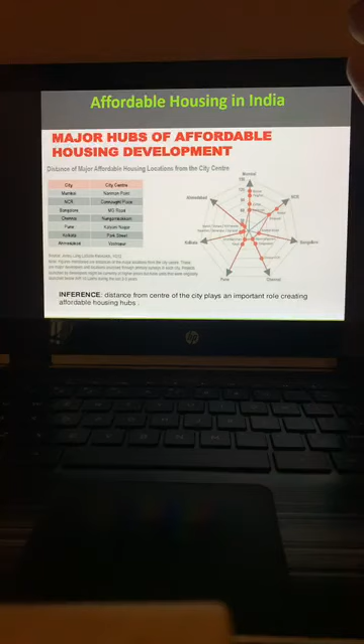Regarding income levels and housing, this is an old report, so it's not very clear, but I'll try to explain the points. Here are the major hubs of affordable housing and the distances - this chart is given, I've shared this PDF, you can see it there. This shows the distance in each city from the main center - in Bombay, it goes as far as 150 kilometers, and in Hyderabad, it is 30 to 40 kilometers.

We have seen the boost for affordable housing as landowners and MHADA join hands. One working model is making landowners partners in the development. Another model is NGOs coming forward to make land available for affordable housing.

Ministry of Housing and Urban Poverty Alleviation is the ministry in central government. They have come up with a mission to expand institutional credit flow to the housing needs of the urban poor, and they will implement the credit-linked subsidy scheme, CLSS. The government is willing to give subsidy to poor people who have income levels less than 6 lakhs per annum.

So that's the different policies. Why should we know about it? It's important for us, the designers, to know this information because we know which product to design for our clients. By eligibility, whenever we design a product, it's not that we just design 1000 square feet or 1200 square feet, because ultimately we have to keep in mind the cost of construction, the cost of land, and the size of the product, so that we can reach out to the target segment in that area, in that location.

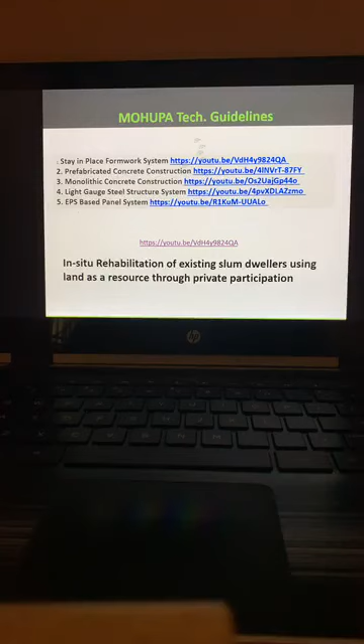So these are all the 5 technologies approved by the Government of India that can be adopted in affordable housing. We have a study report from Andhra Pradesh where they constructed sample houses using 21 different technologies, showing models both before and after completion. They surveyed people's feedback, and the best feedback was for technologies 2 and 3, that is prefabricated concrete construction, precast, and monolithic concrete.

Apart from conventional construction, it is always a challenge to deliver housing within the given time and cost constraints. So it is a challenge for the government, and the government also encourages slum rehabilitation.

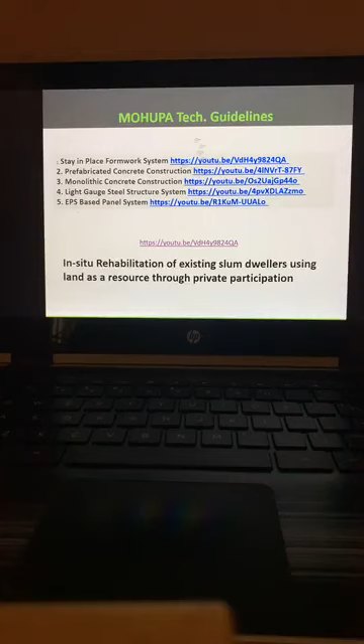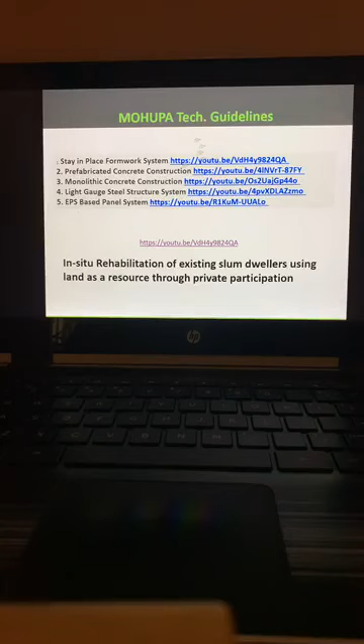In situ rehabilitation means you convince the slum dwellers to participate in the reconstruction of these slums and rehabilitate them in the same area, because the land cost is high, and because of the slum the land value also goes down. So we do the survey, convince the slum dwellers, take up that land, make them partners in that redevelopment, and give them better housing with better amenities.

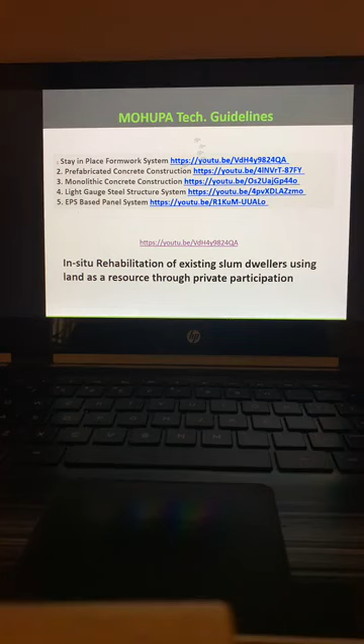This is also allowed by the Government of India - identification of the slums, bastis, and government housing areas.

We also have this GHMC report, where there are 1,476 slums in Hyderabad, out of which 1,179 are notified. The total slum area is 80.45 square kilometers - like a big city, though dispersed. This is 12% of the total GHMC area, which is about 600 square kilometers.

The total slum population is 19,51,000, which is almost 28.65% of the population, and the total number of households in the slums is 4.6 lakhs.

We have also studied road condition and power supply. For roads, 54% are not satisfied at all, 23% average, and 23% okay or good. For power supply, 34% is okay, 33% average, and the rest not satisfying - but since people can't live without power, they somehow manage to make it available.

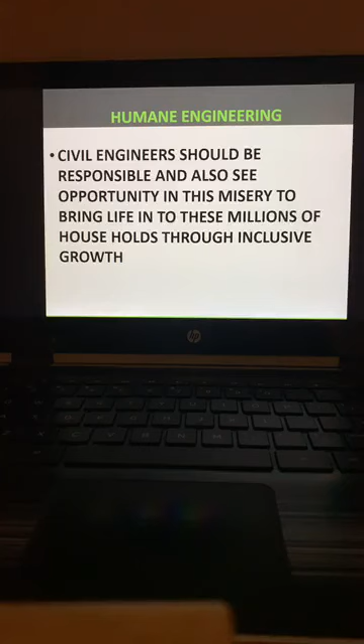So today's topic is this. I am going to explain the details.

There is a government policy which encourages private-public partnerships - we can tie up with corporates, take the lead to bring them in, convince them and convince the people. Don't depend on the government itself. We can work to convince slum dwellers and basti people to convert into slum rehabilitation, and bring in corporates who can invest, while we do the planning and design.

There are many schemes for affordable housing projects with public-private partnerships. This is Model B, and Model A is a private-public partnership with private land-based subsidized housing, the CLSS scheme for EWS, LIG and MIG. So private land can also be converted - whoever has land who wants to convert, we can make a proposal under AHP, go to the government, and convert it into affordable housing. This is also private land-based subsidized housing for EWS, Model B, where the government becomes the main implementing agency.

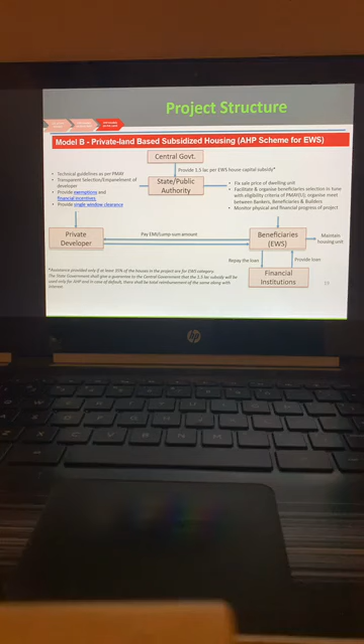So this is the project structure. We can get involved - in fact, I am working on this. That's my experience - we can achieve this if all engineers work for it and plan for it.

In mass housing, we have done Janapriya, Saket, Manjira, Sanjana, Modi clients. We have an experience of 20-30 million square feet of affordable housing, and in Cyber City also we have advised, and on government projects. We have worked on the married accommodation project, which is about 1,000 crores plus in value.

In Telangana housing, we worked on policy for 1 lakh houses to bring in technology-neutral approaches, and implemented about 4,000 houses. In AP, we advised for 60,000 houses procurement, housing at a saved cost. In Maharashtra, we did advisory work in Nagpur for 50,000 houses. In Tamil Nadu we have done work too, and we guided BTech projects and summer internships on slum rehabilitation, on how it can be made viable. We have also worked on private-public partnership projects, preparing DPRs in Andhra Pradesh.

This is the affordable housing implementation presentation we made to the government. These are the options: Option 1 - each site, one package, making it 250 packages. Option 2 - 4 or 5 sites into one package, making it 1,500 units as one package. Option 3 - average 4,000 houses into one package, making it 25 packages.

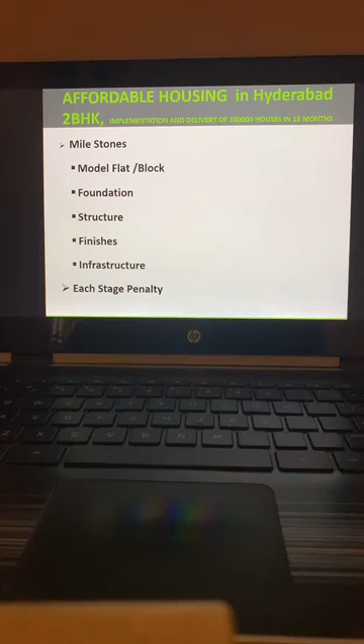Milestones will be model flat, foundation, structure, finishes and infrastructure. At each stage there should be a penalty if the contractor doesn't complete. So we have promised we'll bring in a workable contract model with contractor pre-qualification, and joint ventures will be allowed for technology providers. This has been implemented.

Design considerations for affordable housing projects: we have seen in the past that failures happen because there is no study of the requirements of the people and their expectations and aspirations. So family interaction, group interaction, neighborhood, water, waste management, energy management, microclimate management and finance management are all things we must study when planning affordable housing.

For family interaction, we should provide space for living areas, corridors and community interaction like a community center and restaurants. For group interaction, we need open spaces where groups can meet, particularly in India play areas like cricket, that we should create.

The relationship between neighboring houses, with access chosen for good reason so people can meet each other, and provision of a nursery school, primary health center and other minimum requirements.

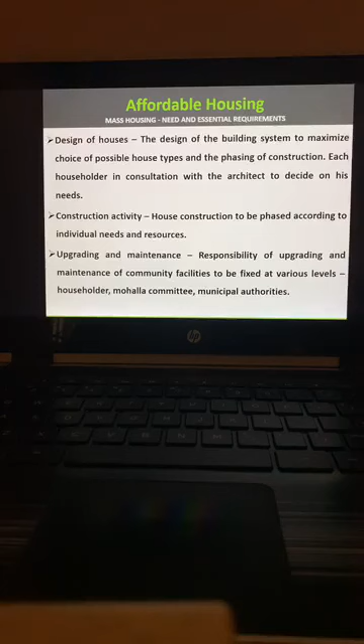For water, waste, energy and environment criteria, we definitely need sewage treatment and recycling because the cost of water is high, along with proper disposal of solid waste and sewage, and recycling of storm water. These are all important criteria to keep in mind while planning, meaning the construction budget should account for all these needs.

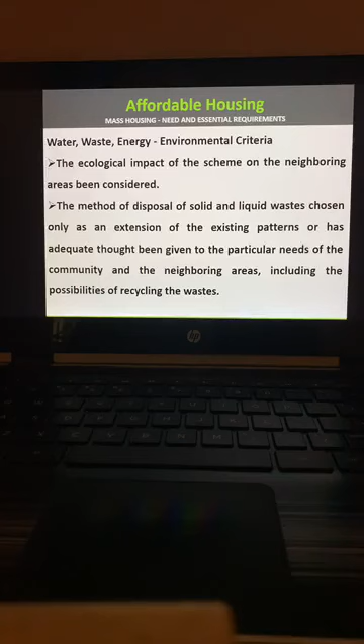Garbage management and long-term quality and quantity of water supply are important. By recycling water for flushing and gardening, you can reduce water demand and ensure quality water supply.

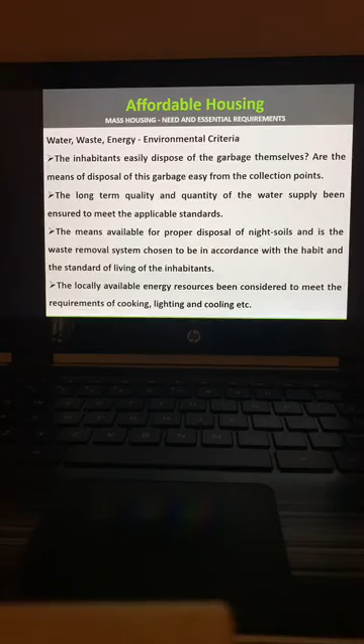For the physical component, we should create a cohesive group of 400 to 500 families per group, with housing density of 85 to 100 families per hectare. Land requirement will be about 5 to 6 hectares within the city, that is about 12.5 to 15 acres. Average plot size should be 40 square meters, and house area up to 30 square meters.

Land is allotted to community facilities like kindergarten, primary school, community center, temple, mosque, and other prayer halls, health and family planning clinics, roads, footpaths, parks, open spaces, and plots. So cost of the land, subsidy for the land, and all that.

This we have done the working. Now to deliver these projects, we have done the study. We have taken a report where, because investments are there for affordable housing by the government and by HUDCO, they are investing and lending money for affordable housing. So there are many foreign construction companies coming up with cutting edge technologies, and there is a demand supply gap which we have seen.

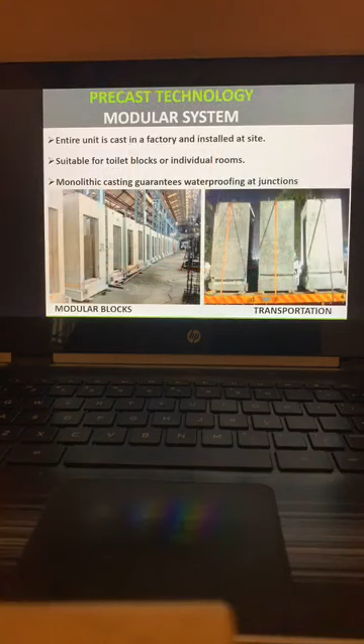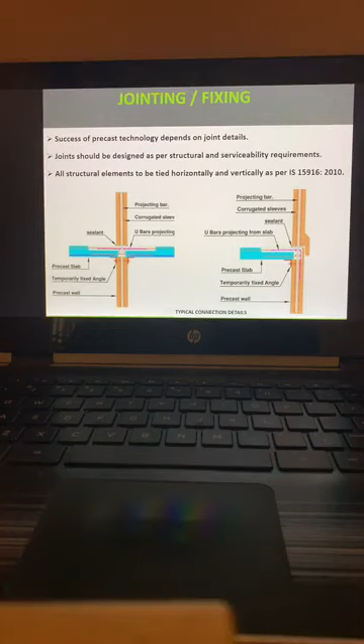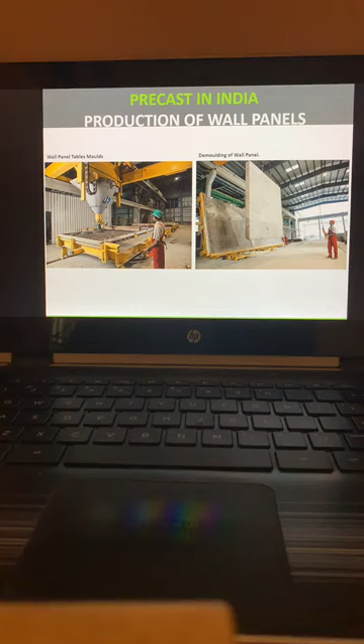Slabs also can be large panel that we can use. And the joint treatment—because everybody talks about joints, I'm just sharing how we treat the joints and how we interlock the structural wall panels, and the casting of the wall panel. This is the tilting table, you can lift the wall panel like this, demolding, transportation of these wall panels, and lifting and erection of the wall panels.

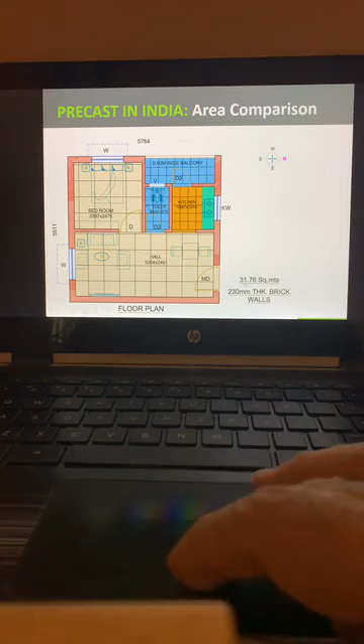And planning for housing, I'm just showing the comparison of a conventional house with a 230 brick wall, the plinth area will come to 31.76 for the same carpet area. If we go for a shear wall with 125 mm thickness, the same house with same internal dimensions will come to 29.6 square meters.

If you go for precast with the same 100 mm thick wall, in precast 100 mm is possible because of the quality and structural capacity of precast concrete, and we can achieve 28.6.

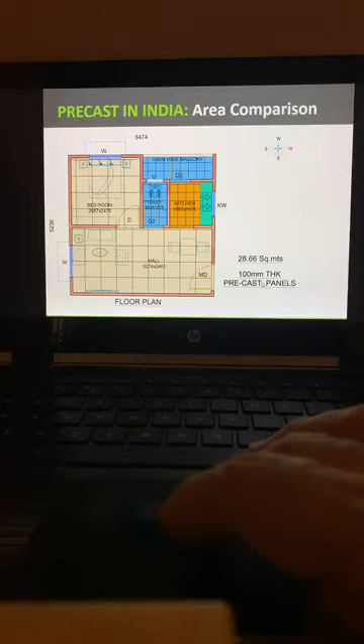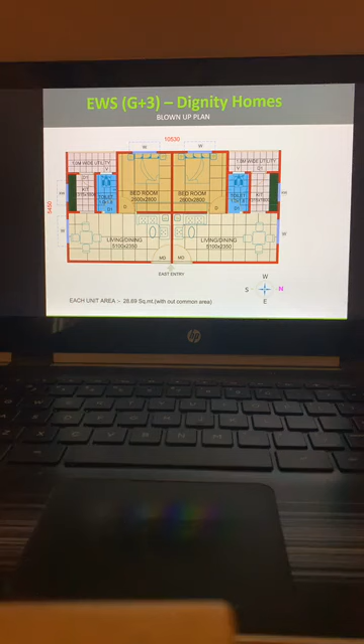Plans, this is another EWS Dignity Homes, with the 28.89 square meter unit area without common area added. This is the east facing, and this is how each block. We found that 16 units per floor is the ideal combination for G+3.

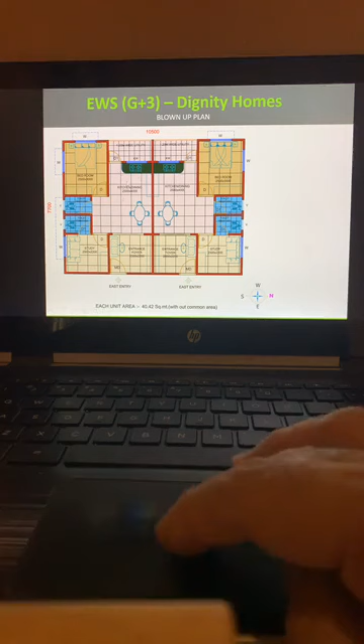This is another EWS G+3 with 40 square meters. You can see there are 2 rooms, 1 bedroom and 1 study room, with kitchen, utility and all that, 40 square meters. This is again 16 units per floor, and this is the 3D view of the 40 square meters unit.

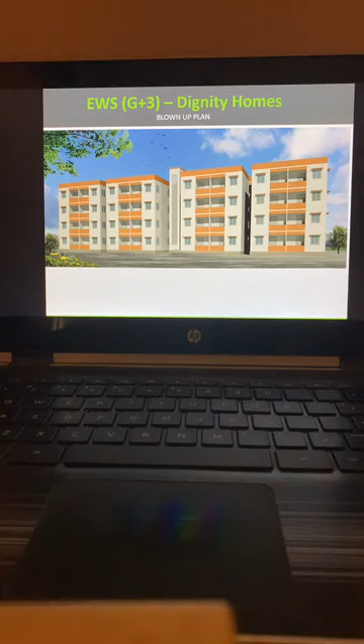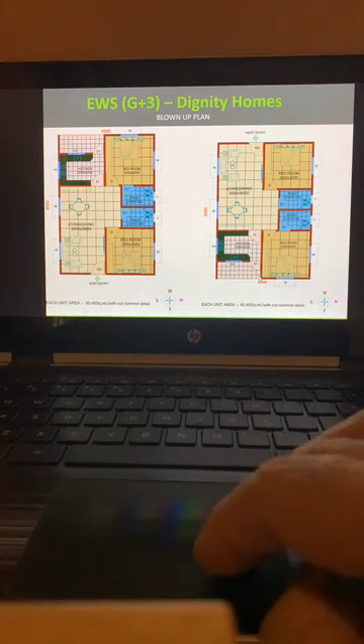Just for an idea. And EWS G+3, another 60 square meter model with full 2 bedrooms, 2 toilets and a kitchen, with entry living. So 60 square meter plinth area, 9.3 by 6.5 meters, working out to 60 square meters of plinth. In that we can get this kind of convenient 2 bedroom housing.

This is the unit plan. When you go for bigger units, you should not provide common walls, so we have separated them. Still it is 12 units per floor.

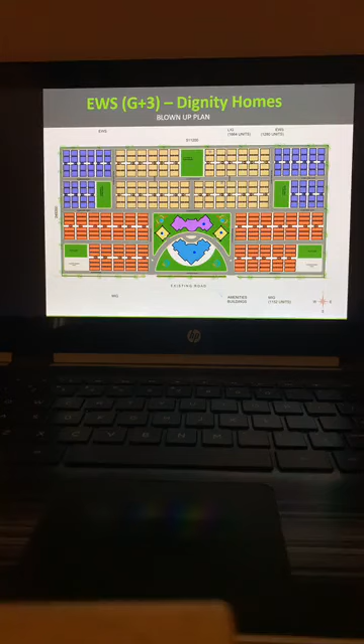This is also G+3, taken to reduce the cost basically. This is a layout with all common amenities, common parks, with whatever concept I have explained - that is common groups and community groups. They will have separate play areas, tot lots, and common amenities for all the people. So this is one concept we have developed.

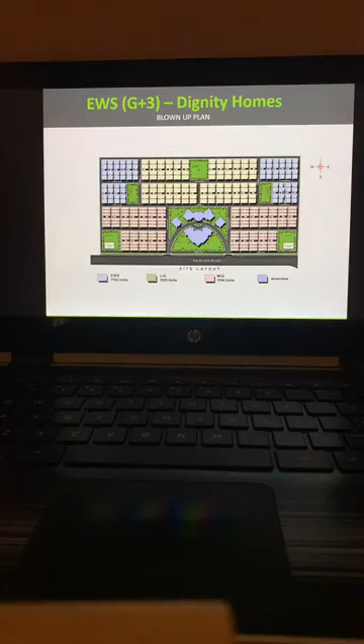This is another concept, Dignity Homes model. We did the cost comparison also, with the area statement for comparison of land required. This is another model - obviously it requires more land, but it looks better and more convenient, and everyone will have easy access to the central park. So this is another model.

For budget, we did the costing for all precast construction, including taxes and plant and machinery. We estimated for a 50-acre development what the common amenities cost would be - it works out to 200 rupees per square feet. The central government gives 75,000 rupees for common amenities for this affordable housing, apart from subsidy.

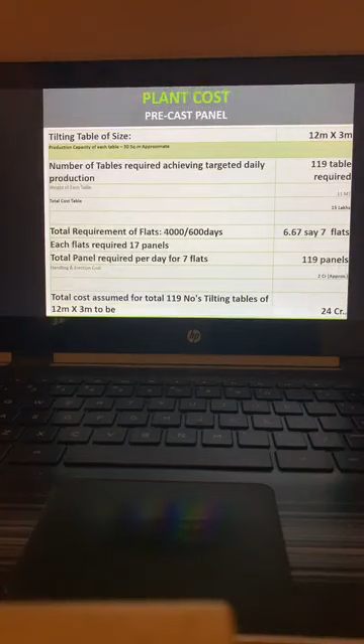This is the precast plant we estimated to set up, to deliver this project in 18 months. What is the precast plant cost required? That is 24 crores, out of which you can write off only 8 crores and recover 16 crores. So the cost of precast will be loaded with only 8 crores for the plant.

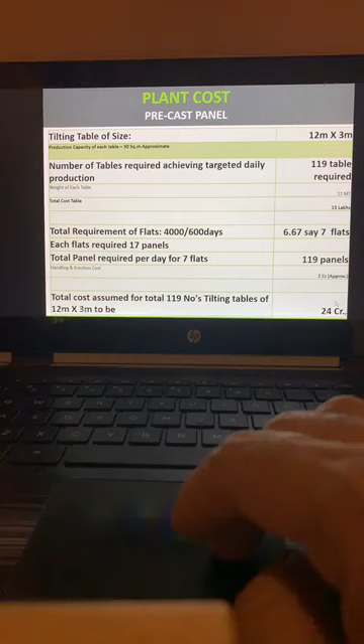We estimated the total cost for the building at 147 crores, and it works out to a per square feet cost. I'll show you, and this is the schedule for total delivery of the project. We have worked out the schedule for the precast option, RCC shear wall option, and brick wall option, that is conventional.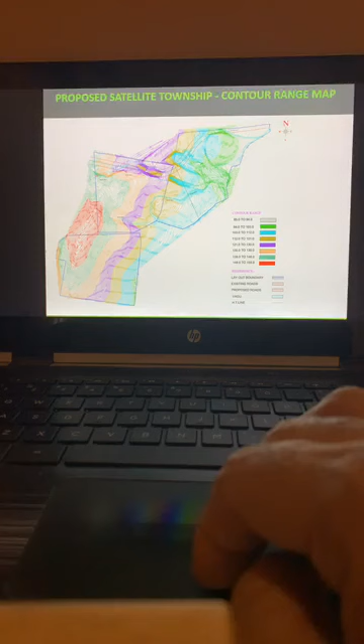Based on this, we have worked out some projects in Andhra Pradesh. This is the master planning for a huge development of 350 acres, and we have given the DPR with the costing for these projects - satellite townships, self-sufficient, with all amenities like preschool, primary, high school, junior college, hospital, bus station, police station, fire station, post office, commercial complexes, all planned in this 350 acre township. We have given the concept cost for all these developments also.

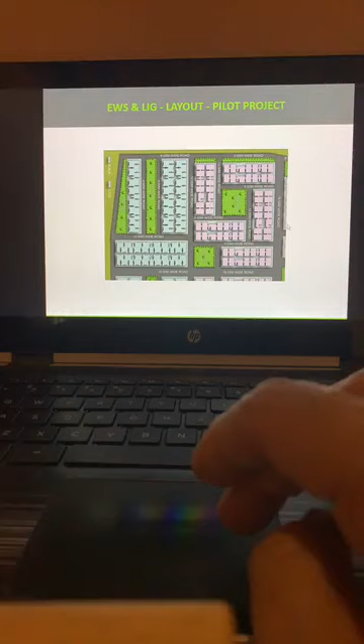This is the pilot project also planned for this. We don't harp on 350 acres - we started with a 15 acre pilot project, and it has received a very good response from the people, where the developer proposed to sell at a cost of 1,500 rupees per square feet, private development. So this is for the EWS and lower income groups.

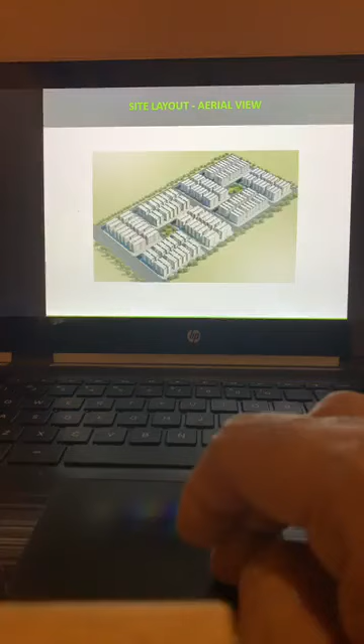So the carpet area is 70 square meters. We have planned this because up to 90 square meters we can have this CLSS scheme in rural areas outside corporation limits - this is for middle income groups and higher income groups. For higher income groups we have planned 107 square meters, because 110 square meters is the limit for the higher income group.

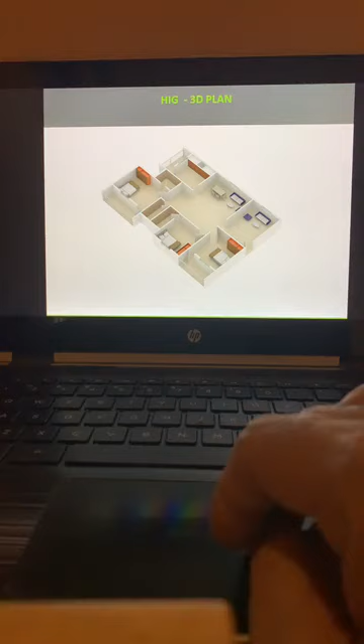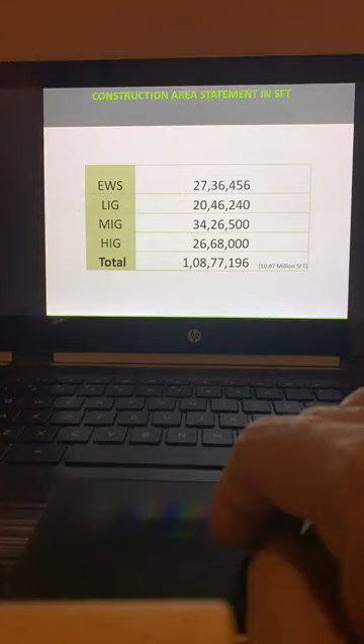So these are all the details. I will not go into this.

I want to quickly go into the project case study, construction cost and construction technology that we have really adopted. These are all the layouts we have done in Hyderabad for affordable housing. This is the project case study I want to share with you.

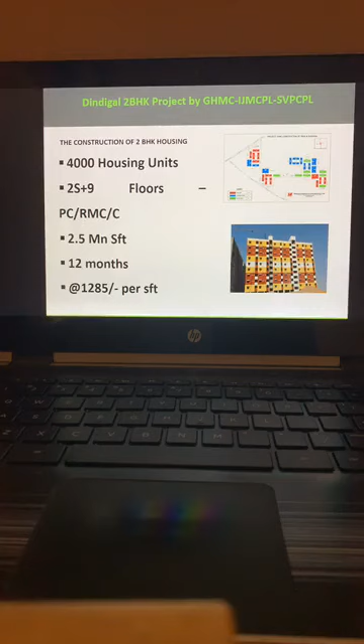This is the 4,000 housing units, approximately 3,996 actually. This is the layout of 20 acres, in which red is precast, green is Mivan, and blue is conventional. We have given the legend here. So we have done precast construction, Mivan and conventional in the same site, all 3 technologies. And cost of construction is 1,285 rupees per square feet.

Total saleable area is 2.5 million square feet. Actual constructed area is more than 3 million. Precast, rigid monolithic construction, and conventional. Building height is 2 stilts plus 9 floors. These 2 stilts will have the shopping, parking, scooter parking and all. And this is the model.

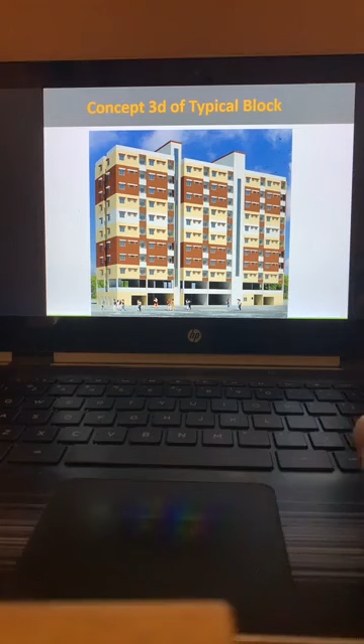And this is the concept design we developed. This is the 3D view given before commencement of construction, for all 3 technologies, same design, so that people won't be able to make out which technology it is constructed.

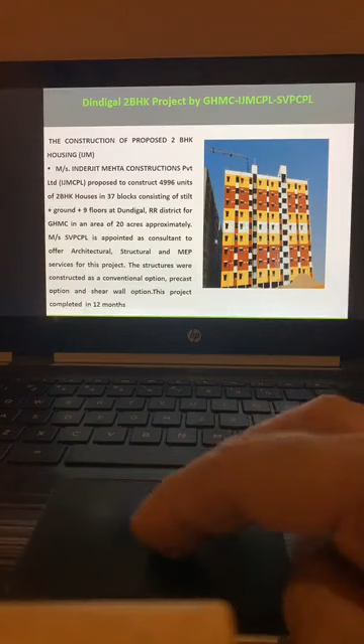This is the photo after completion, before handing over actually, but we have taken it. Inderjit Mehta is the contractor, GHMC is the implementing agency, and in 20 acres this project is completed in exactly 18 months. It could have been completed in 12 months, but for the funding delays by the government.

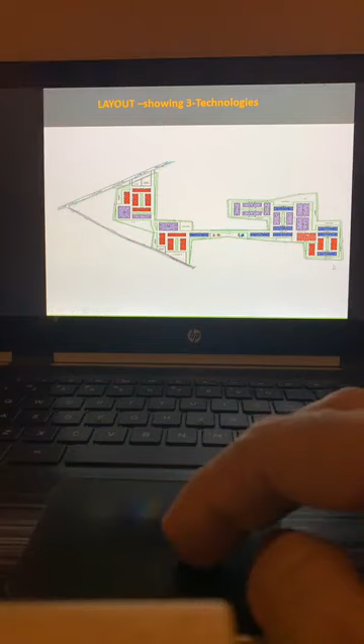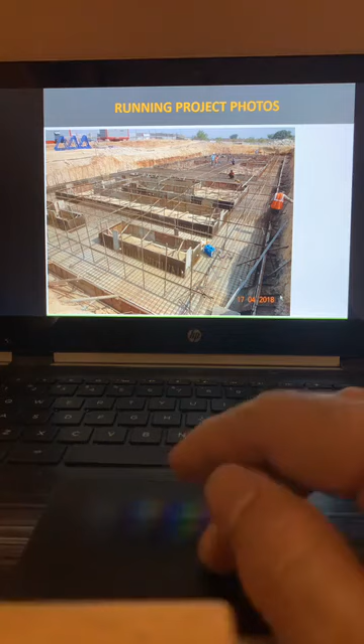So the construction foundations, strip foundations with the reinforcement, these are all the strip foundations because it is a wall and slab construction, shear wall completely. For both Mivan and precast, we have used the same shear wall and slab system.

These are the plinth walls erected, you can see up to the plinth level from the foundation. And these are the dowels from the plinth wall to the stilt walls, shear walls. These are the dowels left, and these are the dowels level. So plinth wall is already backfilled here, you can see. And here conventional is going on, you can see.

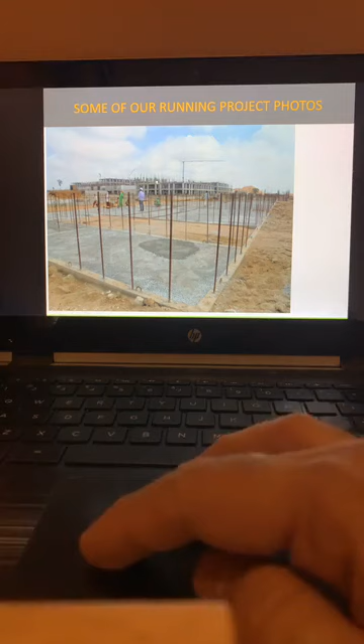I want to show you both conventional and precast are completed at the same time. So here it is the foundation concrete being done, and here also foundation concrete being done, and after foundation, plinth wall dowels and plinth wall erection, and adjacent is conventional column beam slab system. So you can see the shuttering.

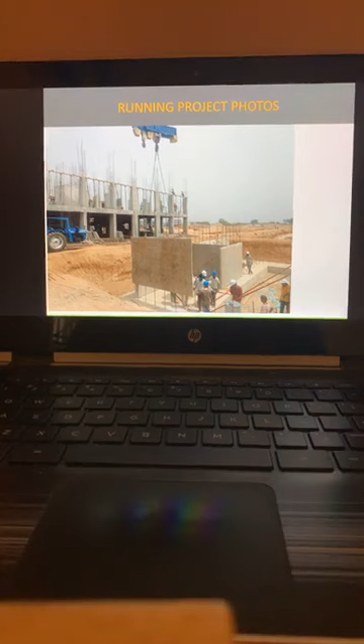So I have proposed these 3 technologies to the contractor. Contractor initially was very hesitant to do this. He was skeptical that he can deliver precast, that problems will come, all that he was telling. But ultimately, after completion of this project, when I referred another project to this contractor, he asked me, please allow 3 technologies. So that is the success of this project actually.

Initially, the same contractor who has opposed 3 technologies on one side is now asking for it, because we have planned and envisaged risk mitigation in labor mobilization, material procurement, and construction schedule. With all that, we could achieve the desired time and cost levels without risk to the safety of the people.

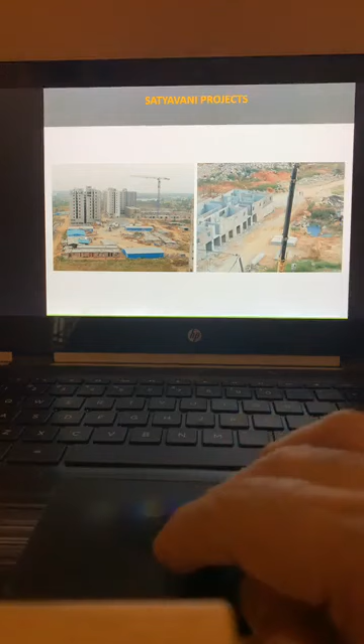So this is the project, you can see erection of the large wall panels, and this is above the plinth wall panels, and this is during construction going on here. And here conventional brickwork is over, but precast, we are still doing the erection here. Yeah, it is the same actually.

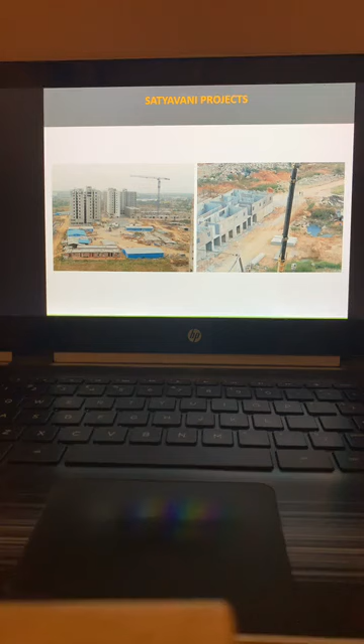We have spent the same cost, 1,285 rupees for all 3 technologies, Srinivas. And this is, I tell you, these last 4 blocks are completed in 4 months in precast. This is real, 4 months erection and finishes, 4 blocks completed. That is the advantage of precast.

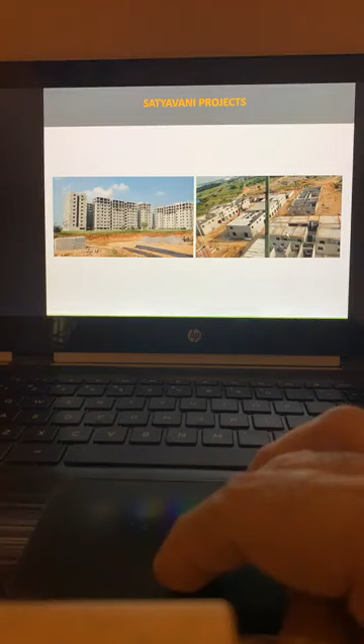You can make up the time schedules while conventional will smoothly go on for 18 months, and precast will make up the time lost within 4 months. That is the advantage of precast.

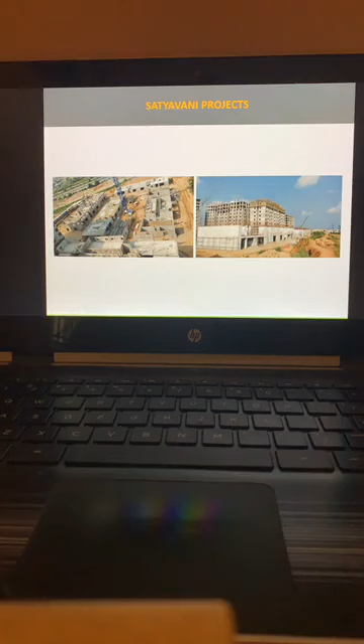So here also you can see Mivan going on here. This is the Mivan shuttering, wall and slab only. And this is the photograph of the entire site, 20 acres. You can see all conventional, precast, and Mivan going on parallelly.

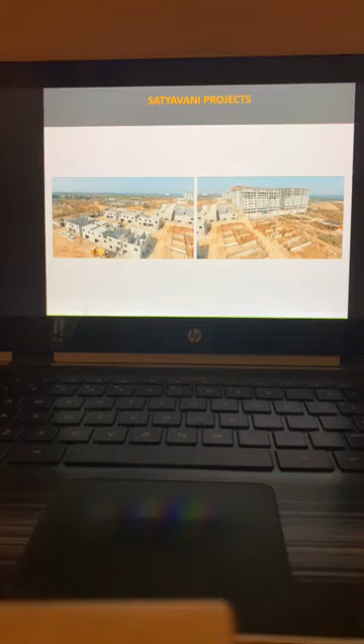See, we had to do 2 slabs every day in conventional. That means we had 15 blocks, each block 11 floors, that means 165 slabs. If we do every day 1 slab, 165 days it will take, that means more than 6 months. So for structure, after structure, brickwork and all, it will take another 4 months. So that is the challenge in conventional actually.

So the contractor had to mobilize 8 sets of shuttering for this project, whereas in Mivan, we had 2 sets of shuttering. With 2 sets, we delivered 8 blocks in a shorter time. And we have achieved a 6 days cycle in Mivan and a 3 days cycle in precast. That means every 3 days, 1 floor is done.

So parallelly, we are having a 10-day cycle in conventional, 6-day cycle in Mivan, and 3-day cycle in precast. So now you can see how we can adjust the schedule, resource optimization and all. That is what we have done.

So here you can see the Mivan reinforcement is tied, and then we'll put the services and all that, and behind it is precast, already erected. You can see the joints and all that. So this is the project. In the same project we had the Mivan and the precast. So this is the photograph of all the blocks you can see.

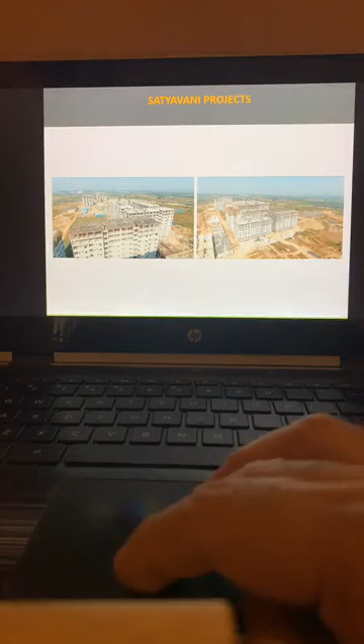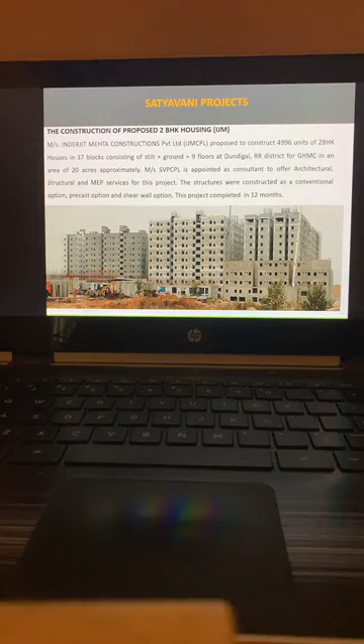And this is nearing completion, whereas the other last four blocks are being done in 4 months. So this is the view of painting started for some blocks, and this is after the completion. I visited the site some 3-4 months back just to see, because we normally don't visit after completion.

So can you make out which is precast, which is Mivan? And definitely the quality of the finish. Here you can see the roads. This is affordable housing the government is giving free of cost to the people. And at the same time we have handed over all the blocks at the same time.

So this is another inside view. Greenery had to be done. So we have gone after completion of the whole thing to see how the finish has come out, as a consultant. This is inside of the flat. You can see the precast hollow core joint here, and this is the cement flooring. You can see the cement flooring finish. We have done cement flooring.

And this is the finish. I'm just checking the wall, whether it is concrete wall or brick wall, by touching. We should know only by sound whether it is a concrete wall or brick wall.

So this is the thing today I wanted to share, that historically housing for the poor has never been delivered. So as an engineer, I feel responsible that we should give better housing for the poor people at a reasonable cost with low maintenance, which is sustainable. So the idea of sharing this topic with all the engineers, young engineers, is that in 73 years we have spent, and we are still leaving 30% of our population in very bad conditions of living.